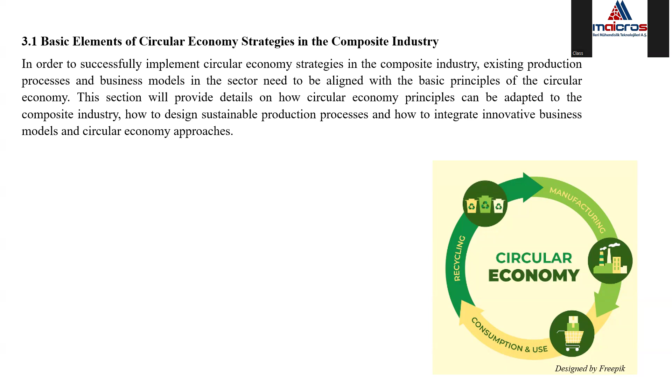Basic elements of circular economy strategies in the composite industry. In this section, we will provide details on how circular economy principles can be adapted to the composite industry, how to design sustainable production processes, and how to integrate innovative business models with circular economy approaches.

The circular economy is a model that aims to use natural resources more efficiently, minimize waste, and extend the lifespan of products. Integration of these principles into the composite industry will change the production process in many areas, such as product design, supply chain management, and end product life. Some basic principles should be taken into consideration to successfully transform the production model of the composite industry to circular economy.

Those principles include reduce, reuse, and recycle. It's necessary to minimize the amount of raw materials used in composite material production, including reducing material losses in production processes, using more efficient materials at the design stage, and preventing excessive consumption. In the reuse principle, recovering composite materials from products that have completed their life cycle for reuse will be an important element of the circular economy, meaning reusing high performance fibers and matrices in particular.

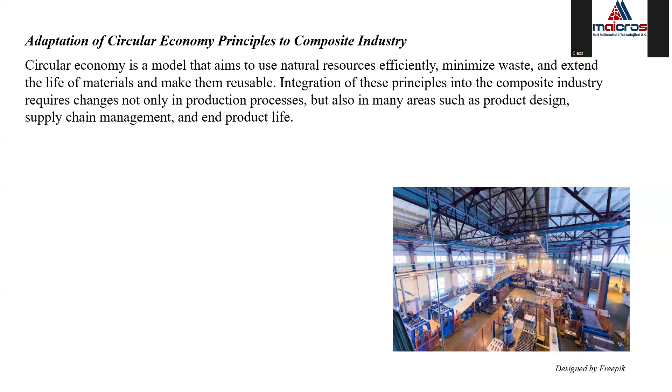For the design of sustainable production processes, we can consider a couple of principles, such as eco-design, energy efficient production techniques, waste reduction, and also green chemistry and technologies.

In eco-design, we can talk about the environmental impacts and recycling potential of composites. These must be considered during the design phase of composite materials. Eco-design focuses on the sustainability of the materials used, extending product life, and increasing the ease of recycling. In this approach, the separability of components during the assembly and disassembly stages of products is also taken into consideration.

Energy efficient production techniques are also a basic principle for sustainable production design. For example, reducing the amount of energy used in composite material production is an important parameter for sustainability. This can be achieved by using energy efficient machines and renewable energy sources in the production processes.

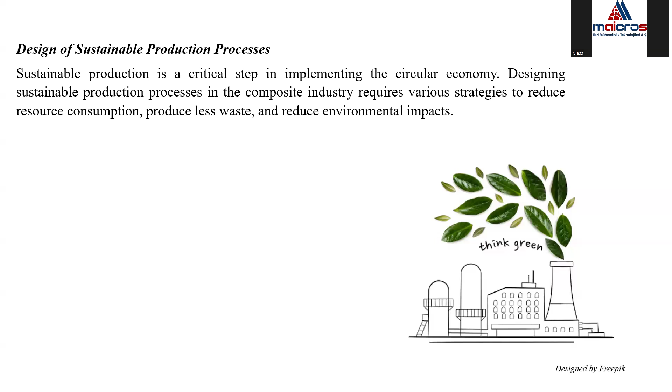In this part, we can also talk about innovative business models and circular economy approaches, such as service-based models, shared economy, and collaborative models.

Waste-based value chains is one of them. So let's start with the service-based models. Instead of selling composite materials, renting the right to use these materials or parts made of composites and providing them as a service is a business model compatible with the circular economy approach. This model can also enable the product to be taken back and reused at the end of its lifespan.

The other model could be shared economy and collaborative models. For example, composite material manufacturers can collaborate with each other to reuse waste. This model allows manufacturers to recycle their waste by sharing it with other industries, and such collaborations can increase material efficiency at the same time.

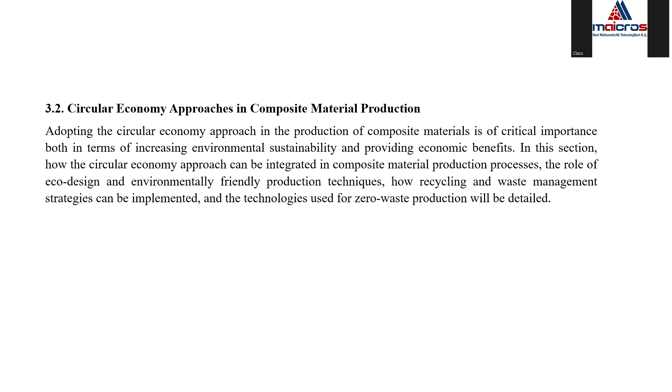In this part, we will focus on how the circular economy approach can be integrated in composite material production processes, the role of eco-design and environmentally friendly production techniques, how recycling and waste management strategies can be implemented, and the technologies used for zero waste production.

For eco-design and environmentally friendly production techniques, there are a couple of stages we can discuss. One is selection of environmentally friendly materials. In the design of composite materials, materials that are less derived from natural resources or that are recyclable should be preferred. For example, materials such as bio-based resins, recycled carbon fibers, or fibers obtained from sustainable sources can be used. Such materials support environmentally friendly production processes at the design stage.

Optimization of production processes is another parameter. In the production of composite materials, energy and water consumption must be optimized. Environmental impacts can be reduced by using energy efficient machines and processes for sustainable production. Similarly, improvements should be made in production lines to minimize waste production, which can be achieved by recycling waste and preventing material losses.

The other step that can be taken for eco-design is modular design. In the design of composite products, modular designs that enable parts to be easily disassembled and reused can be preferred. So when a product's lifespan ends, components can be separated and reused. This design approach is compatible with circular economy principles.

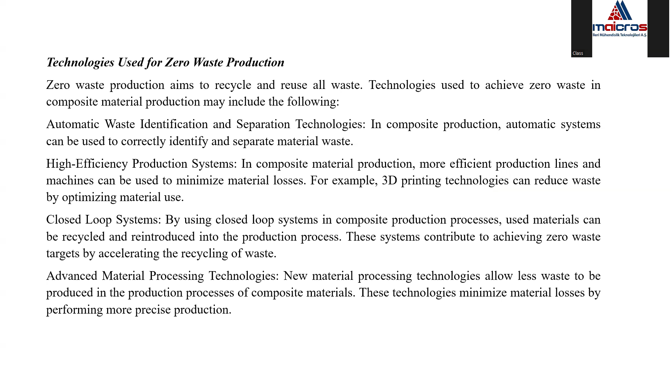The application of the circular economy approach in composite material production offers a great opportunity to ensure environmental sustainability and use natural resources efficiently through the above-mentioned technologies. Starting with eco-design and environmentally friendly production techniques, the process continues with recycling and waste management strategies, making it possible to achieve zero waste production targets. These technologies and strategies will reduce the environmental impacts of the composite industry while also increasing economic and operational efficiency at the same time.

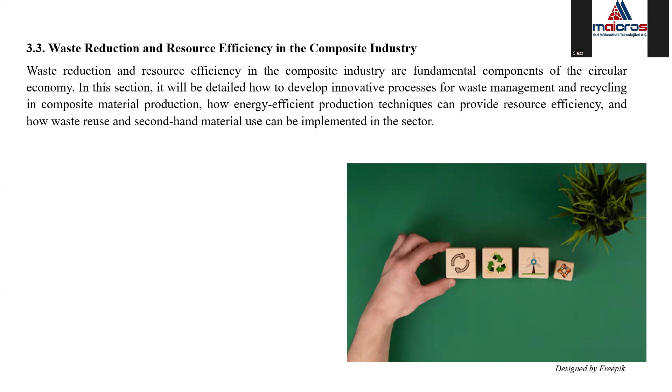So, waste reduction and resource efficiency in the composite industry. In this part, it will be discussed how to develop innovative processes for waste management and recycling in composite material production. So let's start with the innovative processes for waste management and recycling. Innovative waste management and recycling processes can be utilized to increase resource efficiency in the sector and minimize the impact of waste on the environment.

These processes may include, for example, proactive waste reduction strategies. Waste management should be addressed not only after production, but also from the beginning of the production process. Optimizing material use, efficiently evaluating materials used in the production processes, and minimizing waste can be obtained at the design stage, so at the beginning. That will increase the efficiency of production processes and also reduce waste.

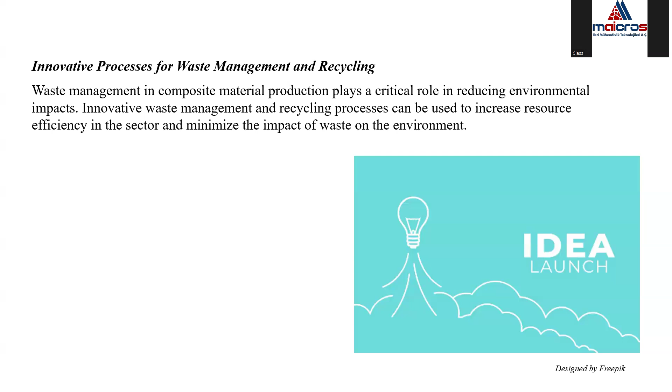The other element could be material recovery, for example, and resin reuse. In the composite industry, material recovery is important for reprocessing and reusability of composite materials used at the end of the product life. For example, resins can be recycled and reused. In addition, waste generated during production can be reprocessed and used in new products.

When we look at the energy efficient production techniques, many techniques can be mentioned in this part. One of them is heat recovery systems, for example. A large portion of the energy used in the production processes turns into heat. That heat is usually lost, but it can be reused with heat recovery systems. And if such a system can be designed, it can contribute to sustainability.

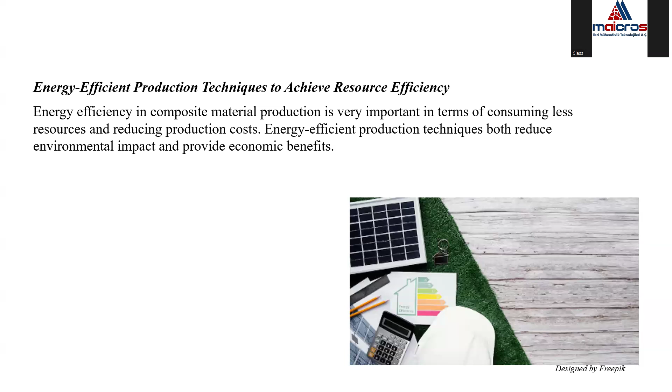High efficiency production equipment will also make a great impact on resource efficiency, and automated production systems for large scale companies, for example, could be very useful to increase resource efficiency, and that will also support sustainability.

For the recycling of waste and use of second-hand materials, it will also be a good idea to recycle waste and use second-hand materials. For example, the use of second-hand materials offers an environmentally friendly approach and can also create economic benefits. So, for example, recycling and rehabilitation of waste.

Also using second-hand composite materials: for example, composite products that have completed their service life can be reprocessed and used for new products or new applications. Second-hand composite materials can be used in the production of new products, especially in the construction sector. For example, composite materials designed and used in the aviation or defense industry, after their lifespan, could be useful for the construction industry. These are some elements that can support sustainability in the composite materials industry.

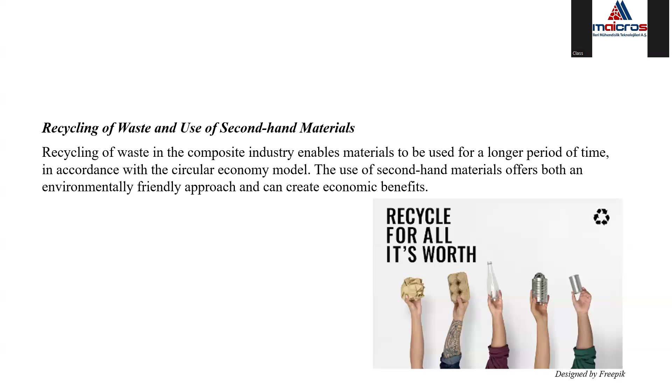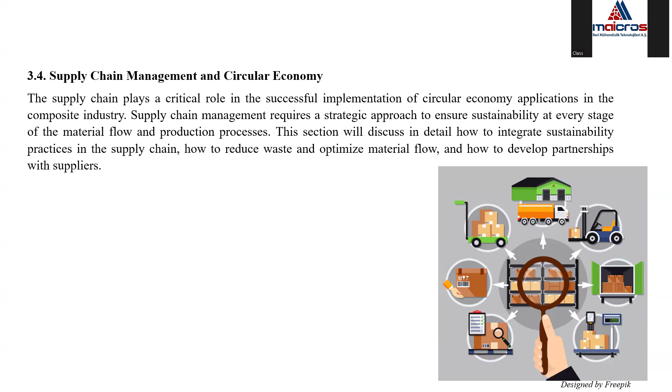Another factor we can talk about is supply chain management and circular economy. We know that the supply chain plays a critical role in the successful implementation of circular economy applications in the composite industry. There are some elements to discuss in this part. For example, sustainability practices in the supply chain. Those sustainable practices may include green logistics, for example.

In logistics processes, more efficient transportation methods and low emission vehicles can be used to reduce carbon emissions. This not only reduces environmental impacts, but also reduces logistics costs. For example, environmental impacts in the supply chain can be minimized by shortening transportation distances and selecting more efficient routes and transportation vehicles.

Sustainable packaging is also a factor that can be detailed. For example, the sustainability of packaging materials used in composite material production should be increased to gain the maximum benefits of efficiency and carbon footprint reduction in the supply chain. All stages in the supply chain should be reviewed to minimize energy consumption and carbon emission. It's important to track the carbon footprint for every component in the supply chain, not just the final product.

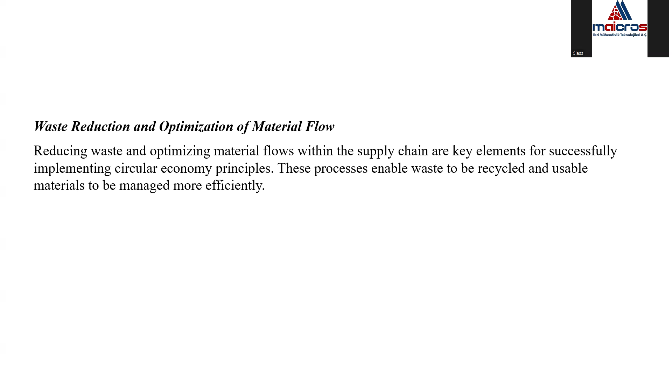An integrated production system could also be a good strategy. For example, integrating production processes with the supply chain will enable more efficient management of material flow. That will allow for faster recovery of waste and rapid recycling in the supply chain.

Another method that can be used for better sustainability is collaboration with suppliers. A couple of strategies that can be helpful for collaboration with suppliers could be setting shared sustainability goals with suppliers. Agreements could be made with suppliers, and they can focus not only on the price but also on the sustainability goals.

By setting common environmental and social goals with suppliers, it will be possible to ensure that the entire supply chain complies with the sustainability standards. That will be a very efficient and important stage for a more sustainable supply chain.

Another method or strategy could be education and awareness raising. Education and awareness programs should be created with suppliers to establish a sustainable supply chain. These programs or trainings enable suppliers to understand the principles and benefits of the circular economy, and integrate these principles into their production processes.

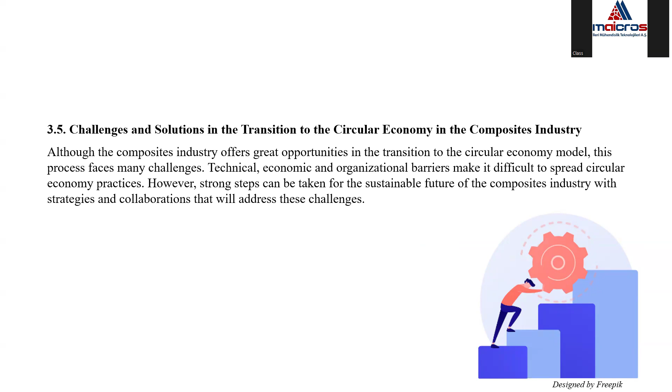So there are many challenges and many possible solutions for the transition to a circular economy. The main challenges are technical challenges. For example, recycling of composite material is quite complex depending on the type of material, production methods, and structural properties.

Recycling of composites, especially components such as fiberglass and carbon fiber, is often a costly and technologically difficult process. New and more efficient techniques need to be developed to separate, reuse, or recycle those materials.

Another challenge is high production costs. Transitioning to a circular economy model requires the restructuring of some production processes, especially recycling and eco-design processes. These processes may lead to higher initial costs.

Composite material manufacturers may have to make new investments to increase the efficiency of their recycling processes, which may cause businesses to be under financial pressure. So these are the main challenges.

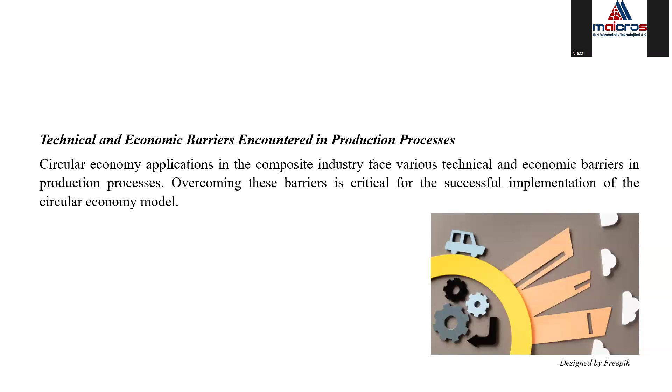But in this part, it's important to mention the role of sectoral collaborations. The transition to a circular economy model will be possible not only with the efforts of one sector, but with the cooperation of the entire industrial ecosystem. Because if the entire ecosystem has the main goal of more sustainable manufacturing techniques, then everything will be easier for manufacturers, for the supply chain, and for the end user.

These collaborations include contributions from both companies within the sector and public and private sector actors. In order for circular economy strategies to be successfully implemented, collaborations between companies within the sector need to be increased. The collaborations play an important role in the transition process.

At the same time, as mentioned before, innovation and research activities are also crucial, because the circular economy requires innovative solutions and continuous research and development activities. That way, the circular economy transition will be possible. For example, development of new materials which are more sustainable could be important at the first stage.